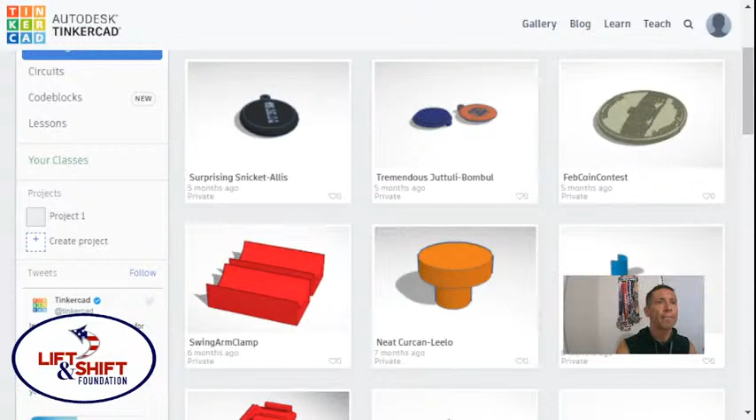Alright, so I've done this in the past. I made this arm right here. Let's zoom in on it a little bit, make it big, make it the center of attention. So this is an extendable arm, two parts, that clips onto the side of my wireframe shelving unit, and that's where my 3D printer is sitting. So right now I want a swing arm right on the same post that this is attached to.

Since I've already got this, I'm going to kind of hack it for the measurements. I'm going to pull these apart, slide those down that way, and now grab this one piece. I'm going to duplicate it, because I want a swing arm like this, two pieces. So I'm going to make one swing arm that I can duplicate, to make it extendable, piece by piece.

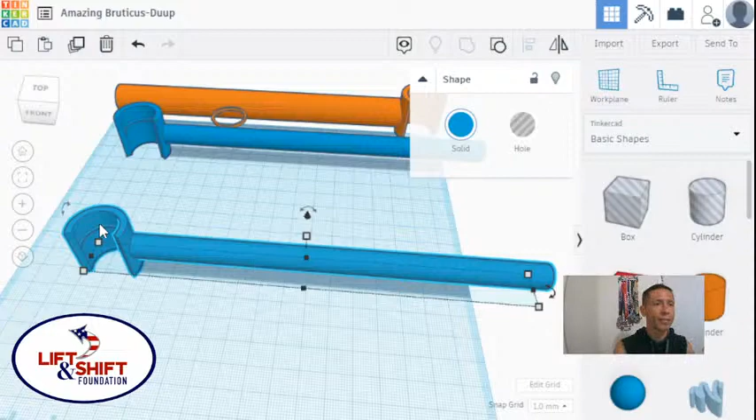And then I'm going to make a bracket that mounts on the post. Believe it or not, this is the perfect bracket, so I'm going to duplicate this again. I love the duplicate feature because it moves things the same distance when you duplicate it. So you see, I had this part, duplicated it and moved it down here, then clicked duplicate again and it moved the same distance away. I always find that amusing.

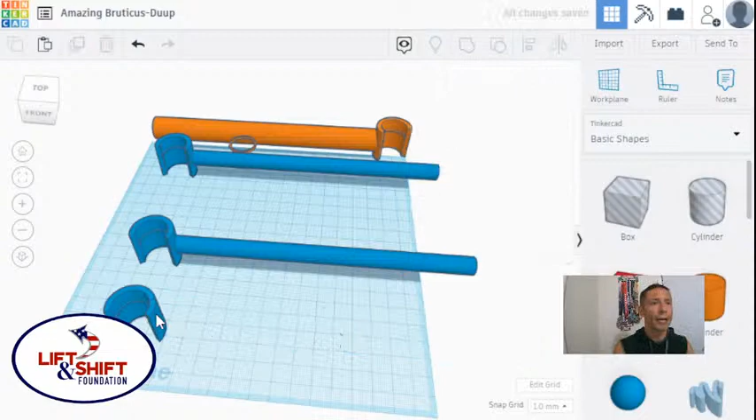But I'm going to take this apart, and you will see what I'm doing. I'm making the rod, or the clamp, so you can see right there how I put this together. I'm going to get rid of this for right now. Let's dive in here, because I need to get rid of that little ring.

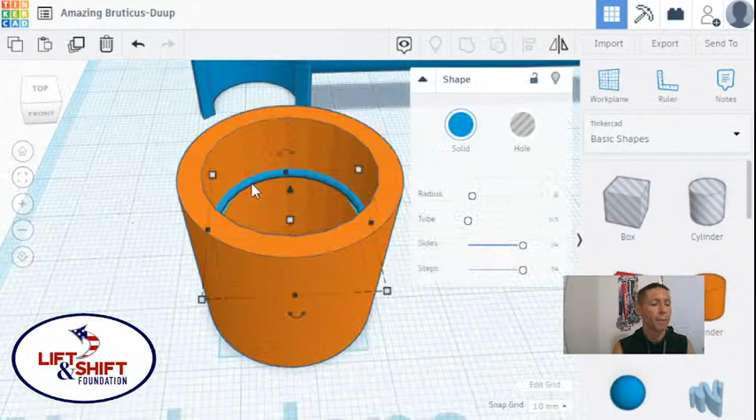So this is going to be my post. And this fits tremendous, it fits perfect on my post as it is right now. But I need another ring.

To make things happen, I'm going to duplicate this. Actually, we're going to do it 3 times. I'm going to set it over there. So this is going to be the part that actually attaches to my post.

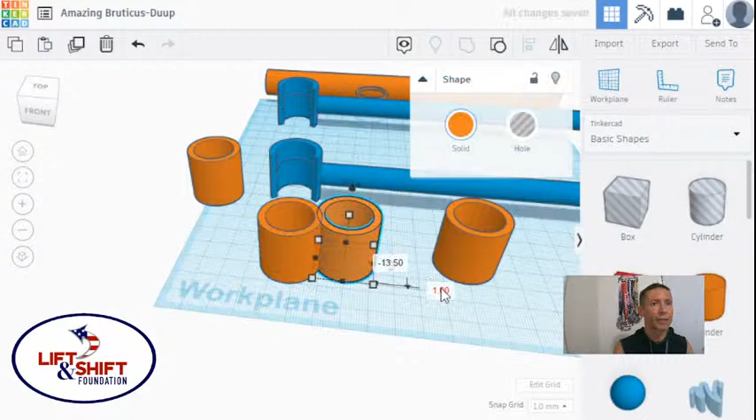Now I want another ring just like this. And this is over here for a reason, for later. And then I want my post to basically go in these and have a continuous swing arm. So that part is cool, I want to do that.

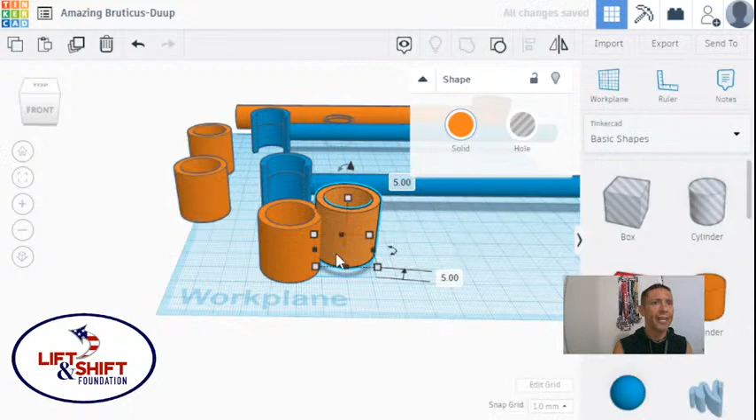But this looks a little creepy. I want to raise this up a little bit like this. But first things first, I can't raise it without... I have this floating surface here. That's not going to print very easy. So here's what I'm going to do.

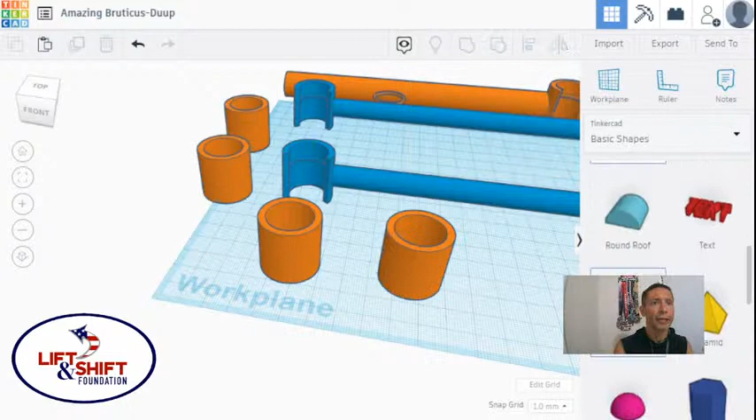Let me back up, I undid for a minute. I'm not going to go deep into the undo and all the features of Tinkercad. Here, I'm looking for the wedge, and I'm going to make it a hole. And I'm going to turn it so I can see it - 90 degrees, like that.

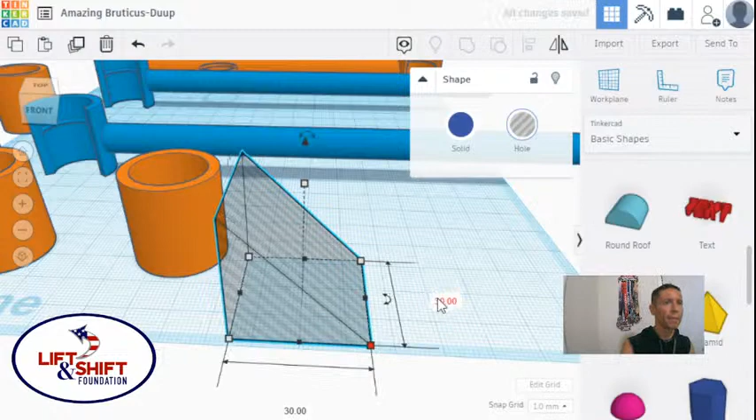Now I need to size it so that it's basically a 45 or less. So let's see, how big is that? About 25 millimeters, so let's make this 30 by 30 by 30. Okay, so now this is a 45-degree angle right here, and I can do this number.

Okay, I like this to have a 45-degree angle because then it's easier to print. But I realize now I need to raise this up some.

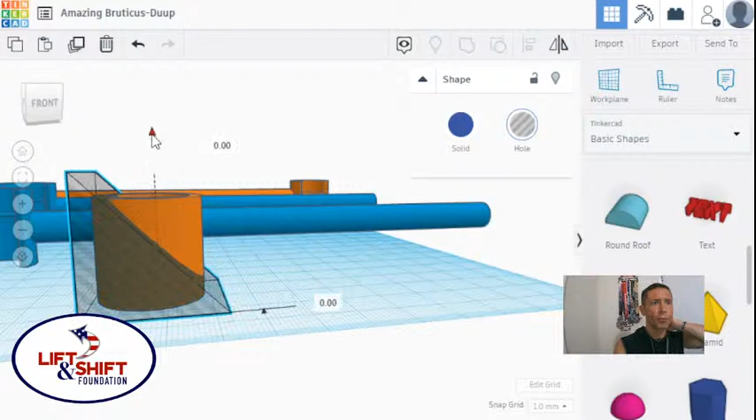Nope, nope, nope, nope, nope. I gotta grab that one. Like that. Now also I need to lift it up a little bit to make this ring, like that.

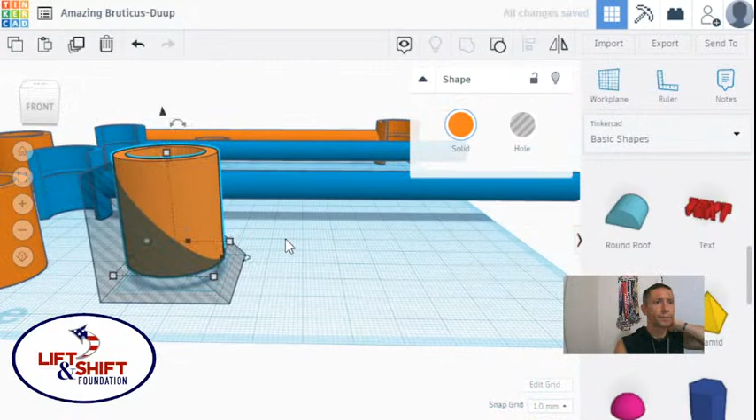And can I get away with lifting it up just a little bit more? Yeah, like that. I just don't want this - since it's going to be in a corner - to have a sharp edge sticking out and jam me in the knee or something, because just like my kids' Legos, this will catch me somewhere.

Cool, so I'm going to slice this up, join them, group them - it's called here. Let's check out the other side of this. Oh, I missed it! Undo.

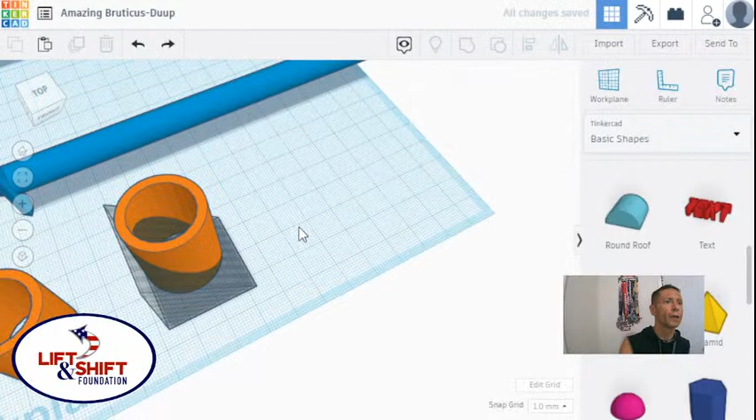So I'm going to slide this over that way. Now redo. Cool. Now I'm going to turn it 90 degrees - or, I'm sorry, 180 degrees.

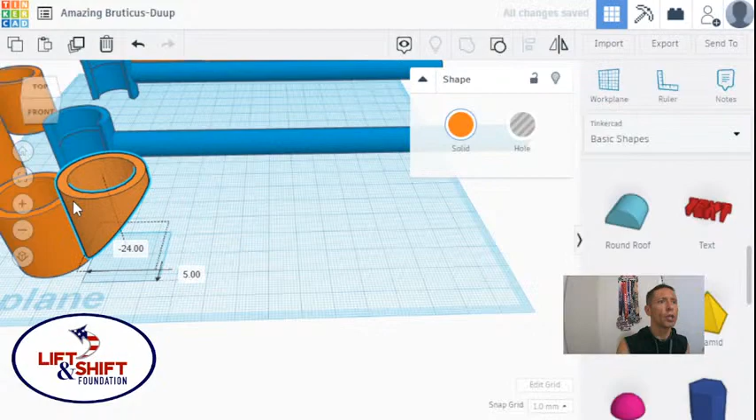Spin it around. Spin me right round, baby, right round, like a record, baby, right round. Never mind, 80s music stuck in my head.

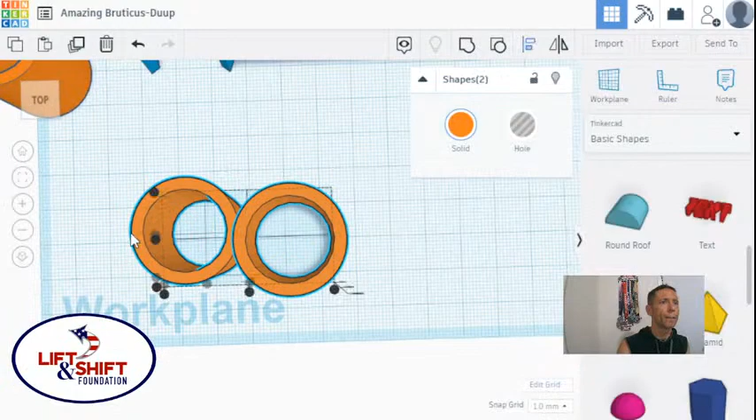Let's do it, so I'm going to lower this a bit. In fact, I'm going to back up, I'm going to align these this way, like that. That way I have this cool angle right there.

Oh, I should have aligned it, I should have made another... actually, I can - double click, duplicate. Pull that out, that's a super awesome feature, I love it.

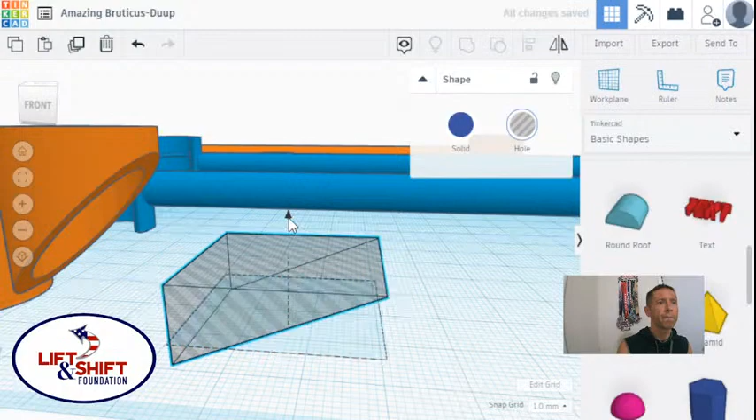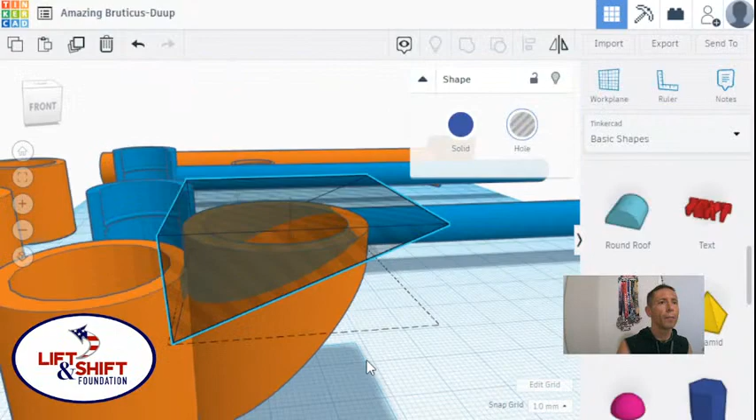I'm going to grab these two and pull them away like that. I want to grab my part here and pull it to the side a little, then get it over all the way. Actually, let's do this - ready? Pow.

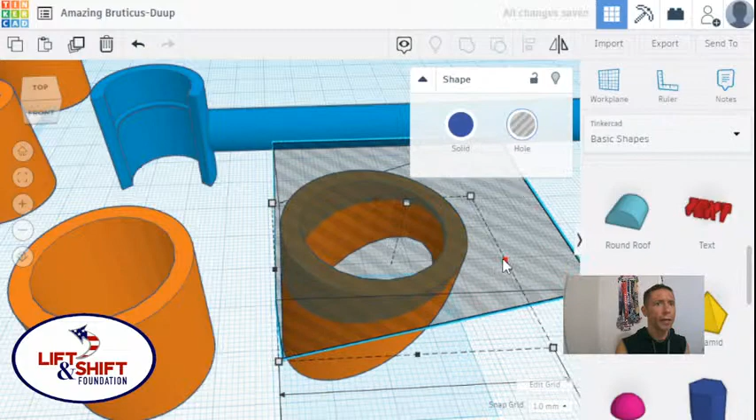Join these two, now I've got this crazy looking ring. I'm psyched about it now, so I can move it back over. Yes! Now I can lift it up, like that.

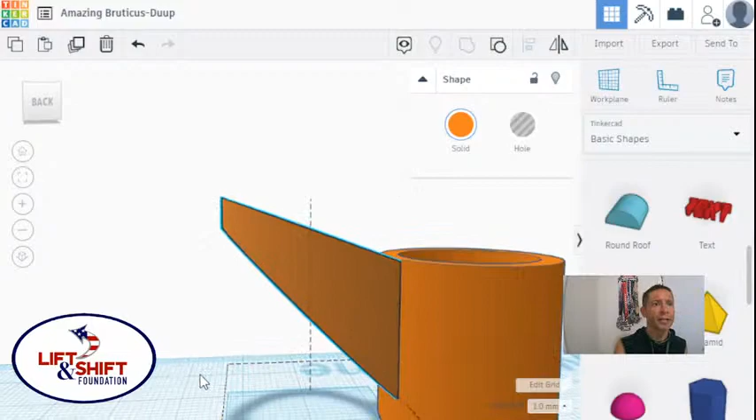I'm just going to briefly mention the reason I like having this part so long on the touching the side is because of physics. So I'm just going to say it - we're going to be creating this rod that sticks out this far.

And if we have a weight, let's say I stick a weight on the end of this, like that - the force down on this is not the force. The weight of this object might be, I don't know, like 10 pounds, right? It's a 10-pound weight. Now if it's a 10-pound weight pushing down here, it's just one straight vector of force.

But because we're putting the weight on the end here, and then we're putting a pin inside here, we're creating other forces, and there are torques involved, and then that's where the distance of this rod adds to the weight here, and the 10 pounds could become exponentially heavier at an angle right here, and then it creates a weak point at the fulcrum.

This is basically a lever, so the weak point at the fulcrum of the lever, or the mount point, or whatever you want to call it. I'm using terrible terms because I haven't done this type of mechanics in a while.

In fact, this is like a whole semester-long class if you've ever wanted to get into mechanical engineering. It goes beyond engineering mechanics, like statics and dynamics, into I believe it's called linkages. There's like a whole class on linkages, like chains and sprockets and gears and things. It's really fascinating to me, but

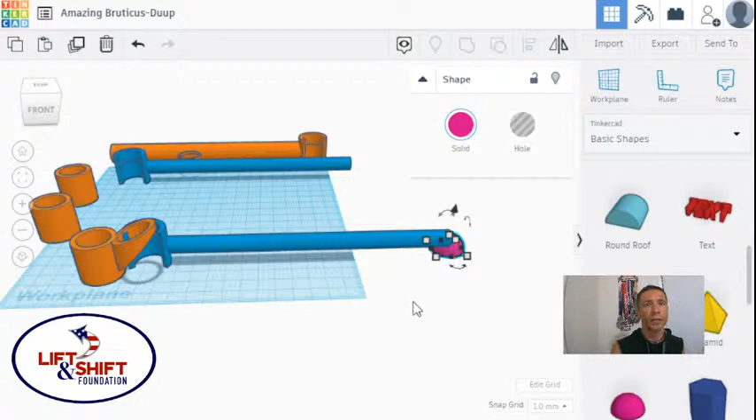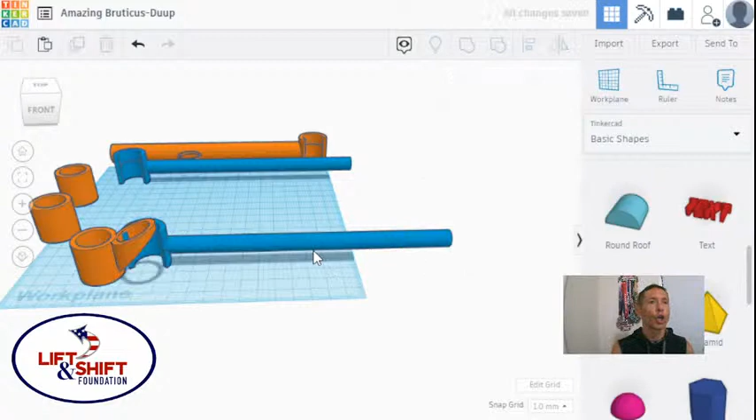yeah, just for reference, I like to have this part come down longer because of physics. Basically, that's the short version. This rod here, without getting into all the math and torques and newtons and vectors and things, is gonna add weight to this part that's on the end. So if I can, I try to make things longer on this part here. Short, very short, non-technical explanation. Hope that was not too boring.

But I've got these parts now lined up, so I've got my bracket ready to go, and I'm going to grab it, join it, poof. So now I've got my bracket that's going to go on my wireframe. And as we move on to the next parts, we want to use this, and we want to make a swing arm. And this part is pretty much already done for us. We already have this arm, and we have half the loop right here.

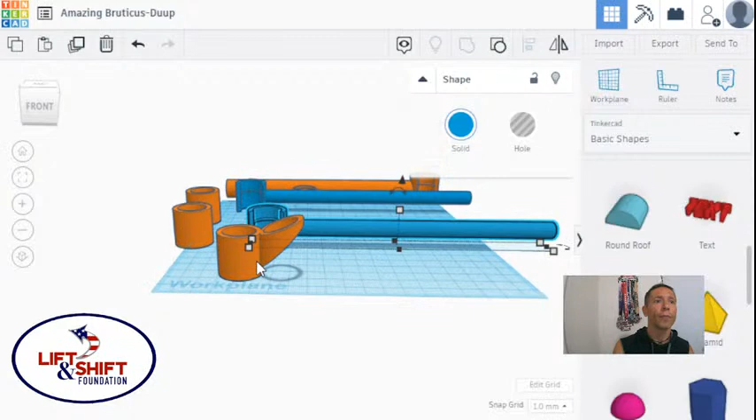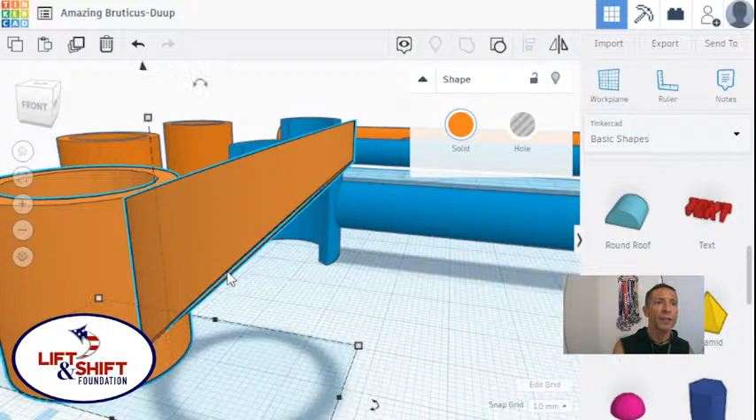And just another note here. I created this part with angles that are so high that I won't have a problem 3D printing it. There's no tight overhang where I have to worry about it. There's this 45-degree angle going up. So my printer should have no problem printing this angle right here as a floating type overhang, which is another reason why I did this. I don't want to print it with a support structure.

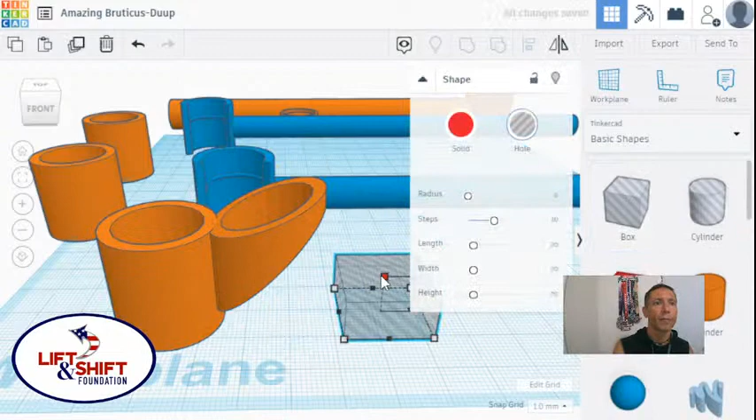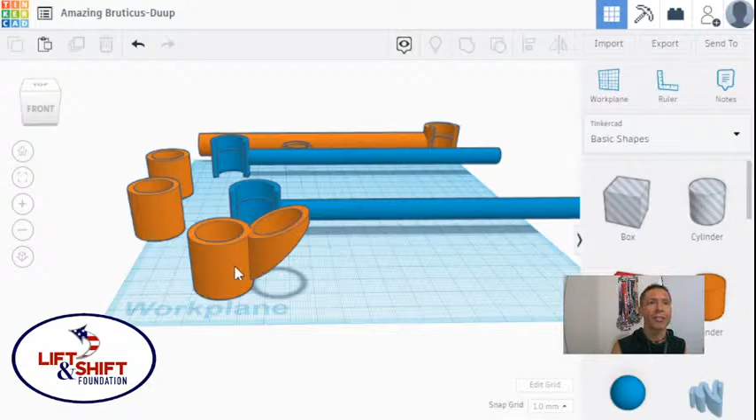And if this does not work, then I have to go back to a flat surface on the top. I would go back to something like a flat surface like that, where I could flip it over and print it upside down on my printer with all the stuff there. But I kind of dig this thing, and I'm gonna test it out. This is a small piece, so I can go through iterations and iterations of it. What I really want to focus on now is the swing arm. So we're going to set this piece aside over here, because that I think is good and ready to print.

Now the cool part about the swing arm is, if this is an extendable swing arm and I make this properly, I can print multiple ones instead of one long. This is a 9-inch arm, and maybe I want 9-inch, maybe I want 12-inch. I don't know. I want to be able to add and remove length to it. So I want to make it like a scissors almost. So what I want to do actually is take this apart, and it's just going to keep getting in my way, right? And I want to shrink this down like that.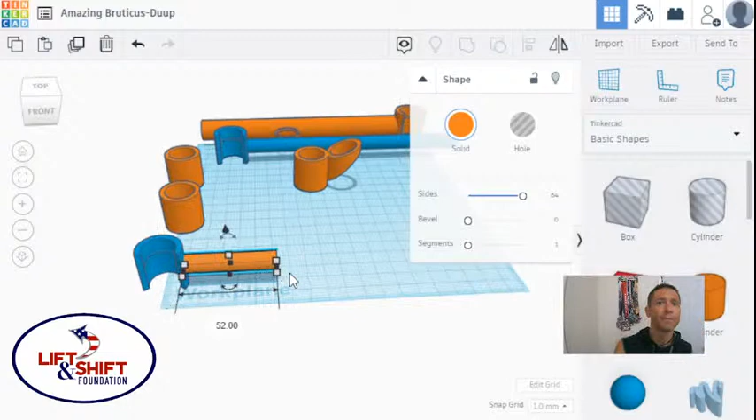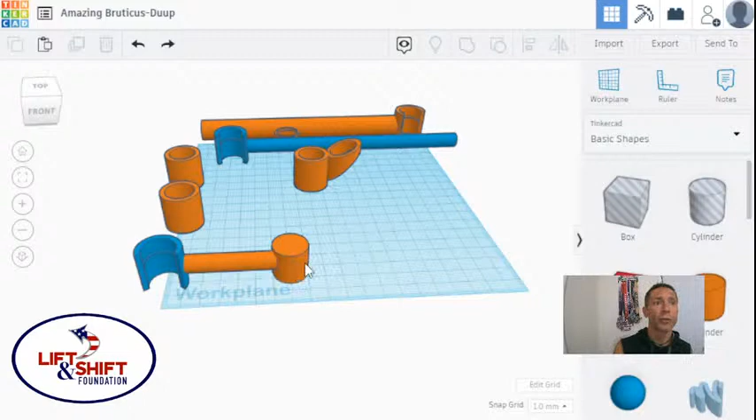And then I want a loop on one end and a pin on the other end. I want basically something that kind of looks like that, so that this pin can go in my, whoops, undo. So my pin can go inside this part over here, and that's really what I want. So right now we're very, very close actually. And if I do this with this 3-part, then this whole assembly right here I can print over and over and over again, and just keep adding more links as I need them. And this will look a lot like, I don't know, like a scissor jack or something.

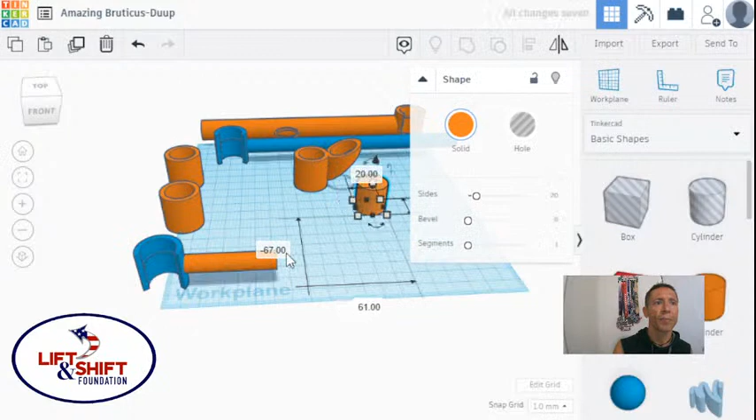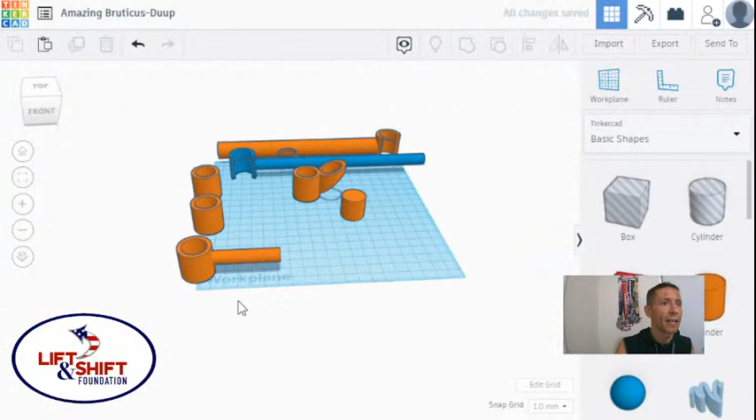But I'm gonna set this pin aside for now, because what I need to do is alter this arm here. And if you remember, at the very beginning of this, I made this bracket the same size as this arm, which was a copy of one of these. So if I make this arm with the same dimensions here and don't change this, whoops. So for example, I leave that as my swing arm frame, then I'm very well off, because then all I need is to make sure this pin fits inside, just like it fits inside here, and then I'm good.

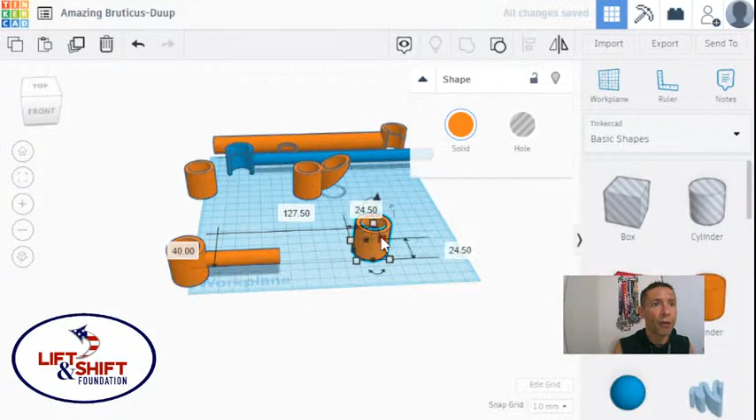But I'm going to delete this, and I'm going to bring this back over here, because I happen to know that when I made this, I made it out of this solid cylinder and a voided cylinder. So I'm going to duplicate this voided cylinder.

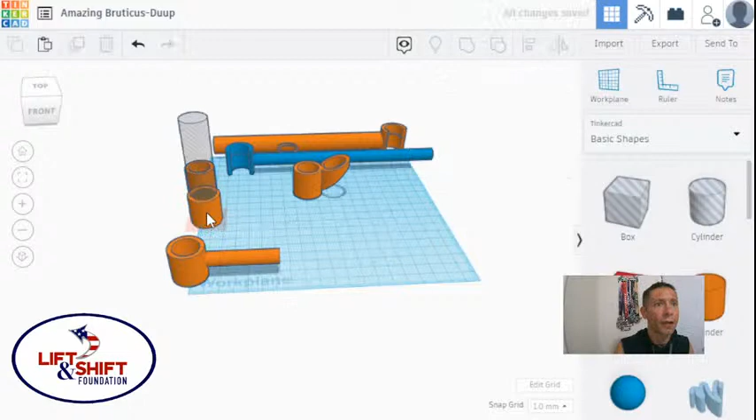Oh, first I'm going to back up. I'm not going to use that feature. I'm going to use the double-click feature, and I'm going to grab that voided cylinder and I'm going to duplicate it, and I'm going to put it over here. Now I'm going to click away. So I just got this back. I can make it a solid, and now I know exactly how wide this cylinder is.

Excuse me. So in the context of Tinkercad modeling, I've kind of got this down. I'm just going to crank up the sides. And what is this? 19.50. So here we go. Here's some interesting stuff. I need this to be just slightly smaller than the ring. I need this part to fit inside of this part. So I need to just make sure that it's slightly smaller.

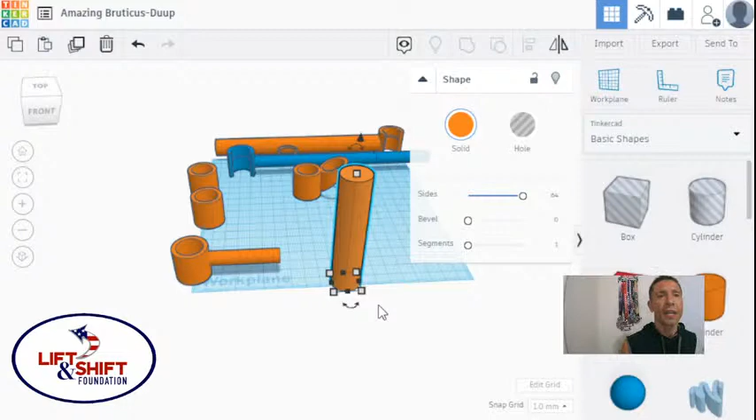So I need to, I don't know, make this maybe 19 millimeters in diameter. But my 3D printer has like a minimum tolerance. So there's a minimum size that it can print, depending on which setting I use to print, and I'm probably going to use like 0.2 millimeters, like a standard print profile. If I go in 0.2 millimeter increments, that's going to work.

So right now it's not going to print 19.5. It might not print 19.5. It might print 19.4 on my printer. Between 0.4 and 0.5 is what I've kind of determined. Anyway, what I think I want to do here then is change this to, let's say, 19.25. That way I give myself a little bit of clearance. So we're going to do this, 19.25, tab, 19.25, done.

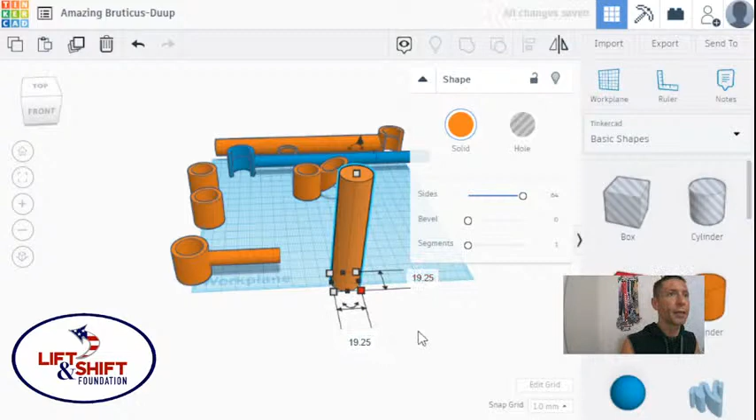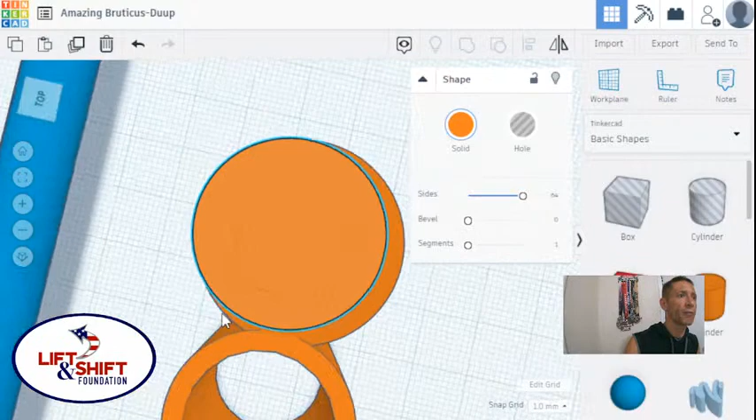Now we're going to bring this down somewhat like that. So this is the size of the pin that I want. And this pin will fit inside here. In fact, if we do this number, we can see that it's very close to fitting right in there, right? Yeah. And if we drag it over here and actually do the align thing, we will find that there is a slight bit of room inside of it. In fact, I might drop it down to 19.1.

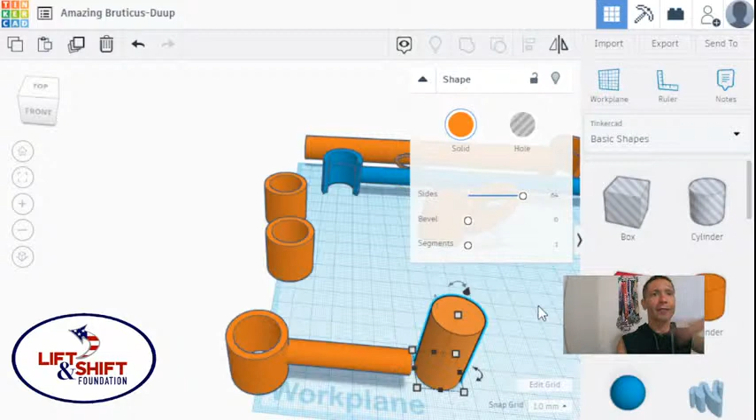Because millimeters are tiny to begin with, and we're looking at a grid that is very, very tall. And I don't want a lot of play in this, so my arm doesn't flop all over the place. I want it to be very, very tight in there. So actually I'm going to leave it where it is for now, and I'm gonna make some adjustments here to make this one complete model.

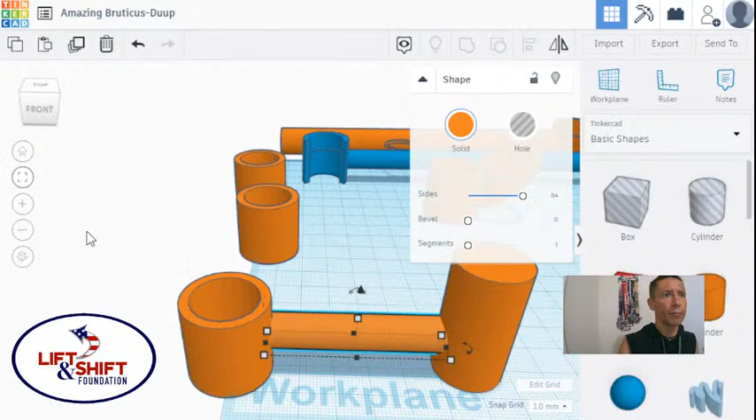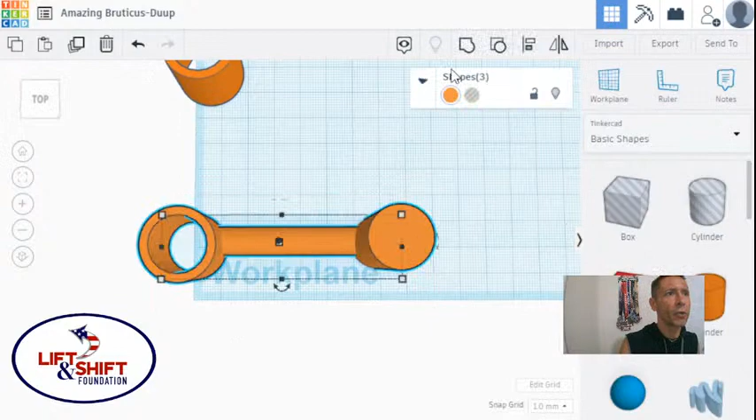One of the first things I'm going to do now is move the view to the center here of this. I'm going to put this out of the way. One thing I need to do is move this down so that it's on the bottom, because I can't print in space, and that's cool. I want my swing arm to be a little odd shaped. The other thing I'm going to do is align these here like that. Cool. Now, me personally, this is a 10 millimeter rod.

And if you give me just 1 second, I will go get the real part. It's right here. It's right on my printer. And so, here we go. I'm back right now. This is the original bracket. And this is the original outside the tube.

And this went together, and it extends, and you can see, ta-da! I can set this on my thing, and it actually hangs on my printer, and it holds up my 3D printer filament. But this is a 10 millimeter rod, and for a swing arm, that's reasonable, right? And then these are the arms, and they kind of fit like the bigger rod here. You can kind of see that. So it's not unreasonably sized.

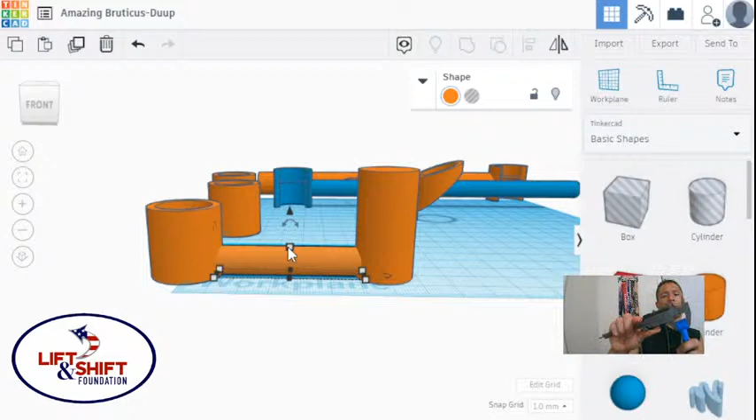The one thing I will say is I'm going to break out the caliper and say that this part here is 1 inch tall. So that's going to give you some perspective. So this looks more like 7/16 of an inch. And I'm okay with that. I'm really okay with that for like a 3-inch arm, I think.

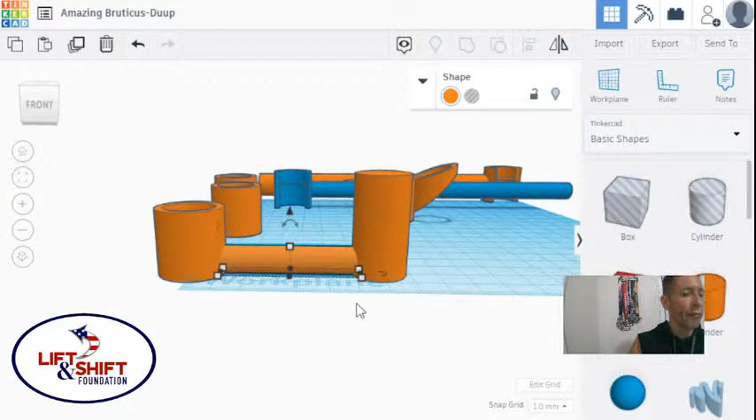Which means instead of me making this part taller, 24.50, I'm going to bring this part down to 24.50, so they're both the same height.

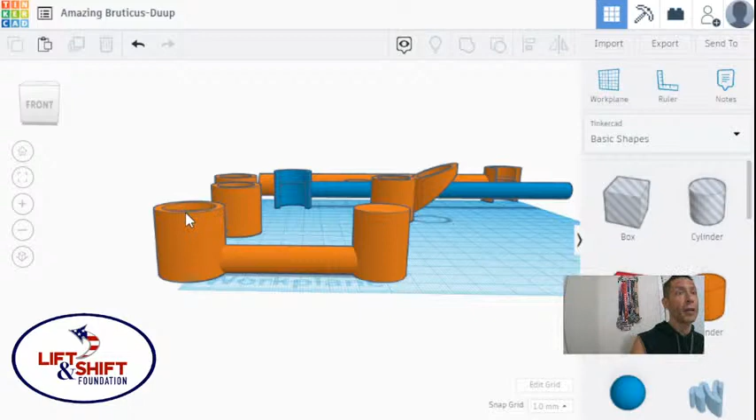Cool. So this is not actually going to go all the way into this pin because the arm is here. The arm is in the way. Yep. Surprise! So even if I make these the same height, they're not going to interlock at the same height. So this part will never ever be shown out the bottom. It won't be flush even though they're the same height.

And subsequently every other arm is going to be another half inch, basically another half inch up higher. So I will want to mount this thing, and let's see how long this thing is. 90 point. This is the part I want to work on next, is how long this is. I'm not going to do any math right now because I'm lazy, and I know this is much easier to do. So this is about 3.5 inches wide, and I was going to say about 3 inches, but I don't want to be cocky.

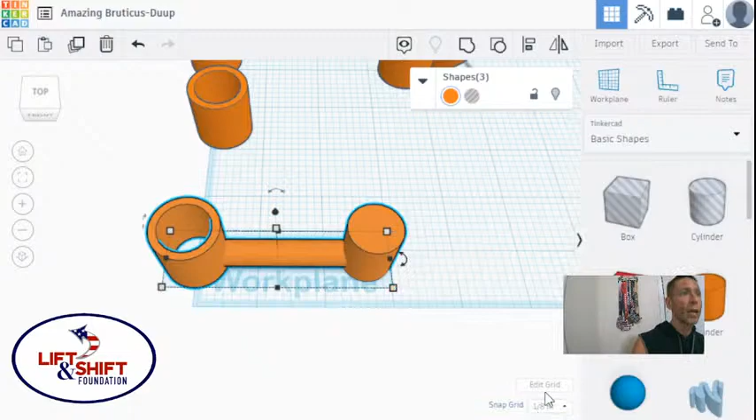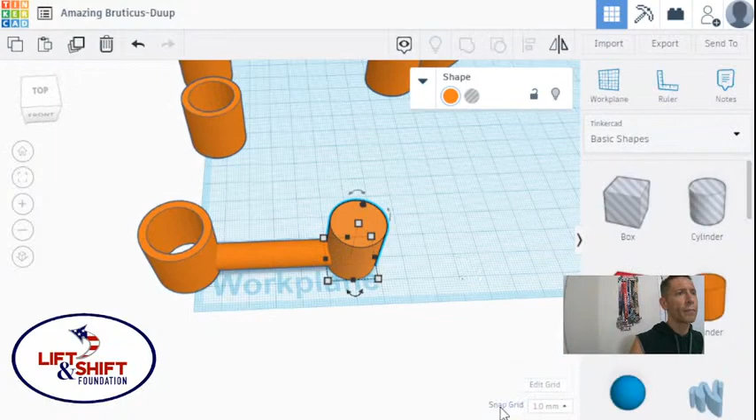So let's see, 3.448. I'm okay with that. I'm going to move back to millimeters. I said I wanted about a 3-inch. In fact, I'm going to shrink this in a bit. Keep going. Nope. As I said, I wanted it about 3 inches. Although now it's starting to look a little goofy, right? Maybe I do 4 inches. Yeah, 330, and it's starting to look a little goofy. I haven't even got to 3 inches yet. So let's move it all the way out to like 4 inches.

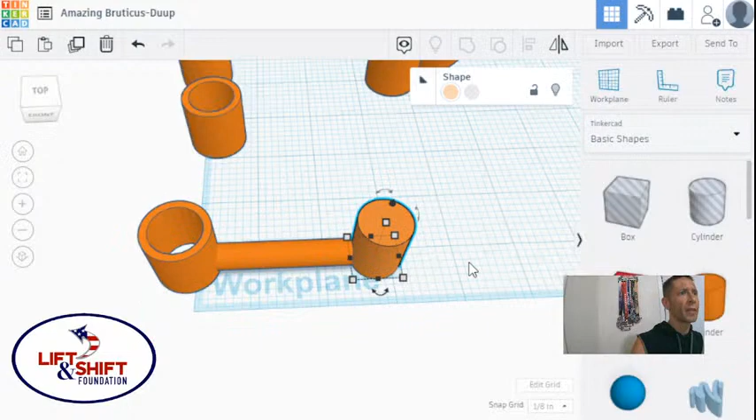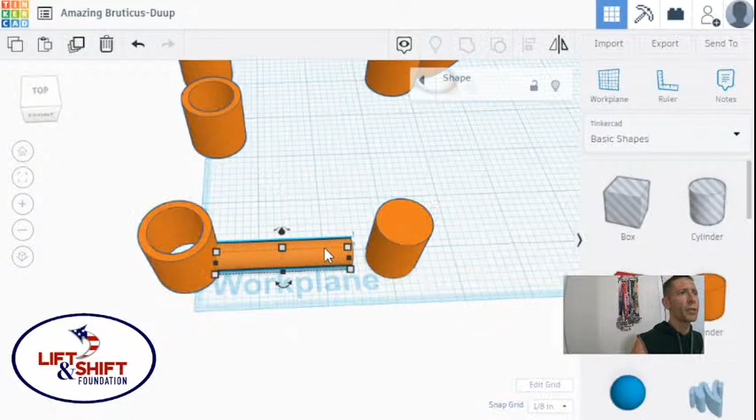375. 383. One more. 3955. Close enough, right? That's very close. So here's what I'm going to do. I'm going to slide this part out like that. I'm going to go back to millimeters. I'm going to move this part a millimeter out. Actually, I'm going to snap grid to 1/4 millimeter, and I'm going to move it 2/4 millimeters out. And then we're going to see just where we are in inches. 3.974. That's so close, right?

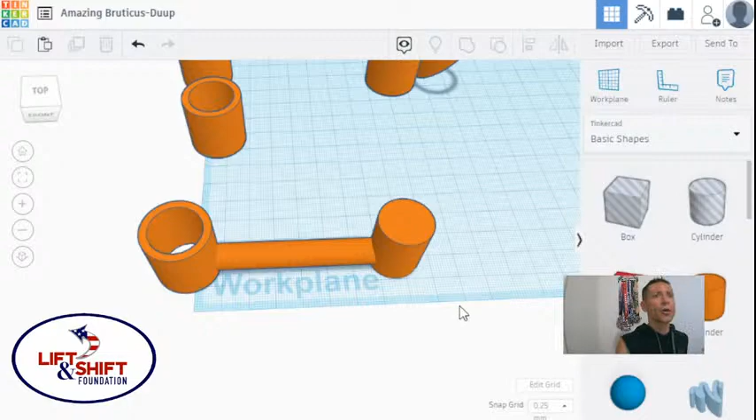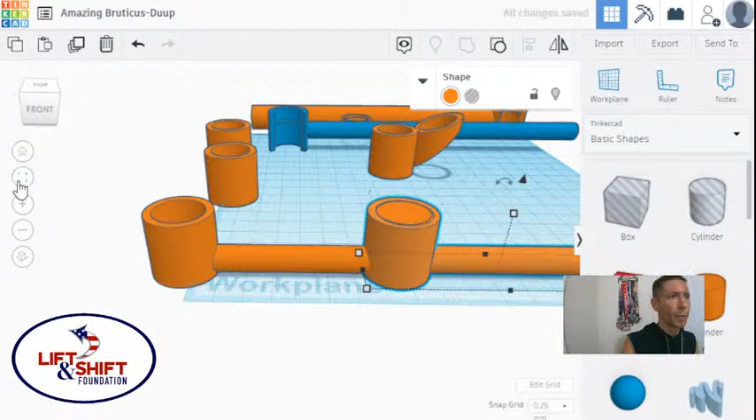Dun dun dun. So I'm not gonna get all wrapped up around the axle on this one. I'm just gonna leave it right there. That's gonna be my 4-inch swing arm, and it's only one. So let's do this. Let's group. Pow. Cool. There's my swing arm. So check it out now. We're going to duplicate this, and we're going to put it like that. Now you can see my swing arm actually happening, except it won't ever fit like that. It will go like this, if you see what I'm saying.

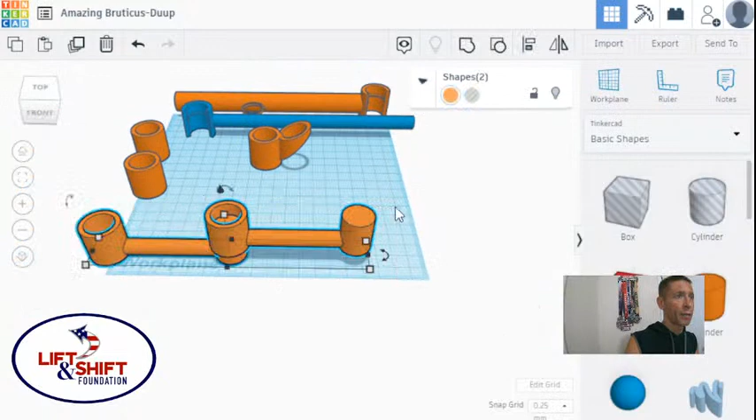So the swing arm assembly will swing like that. And in fact, this whole thing will turn like that. And then we can turn each piece, or we can turn it all together. But here's what I want to show you. It's actually going to fit right there, like that. And now, as I'm piecing this together, I'm realizing there is a flaw, because this raised part will not want to sit out here. It will always want to come back and rest on the pole. It will always do that.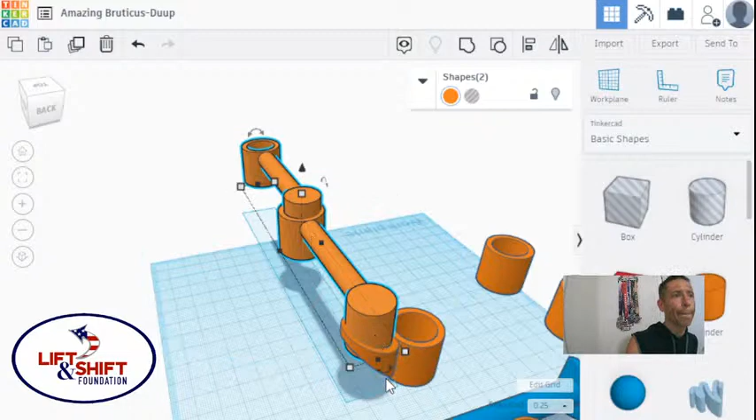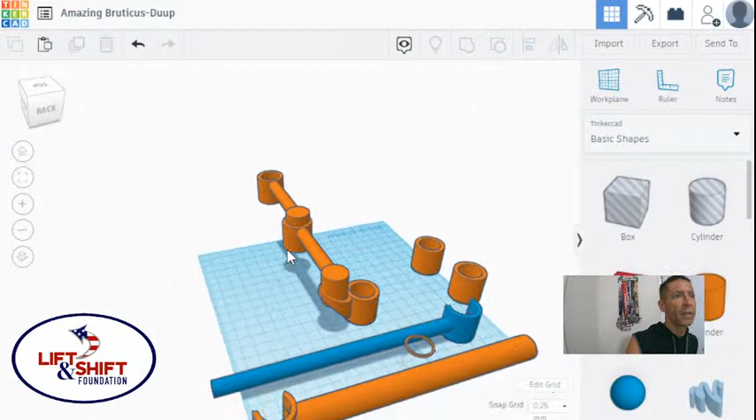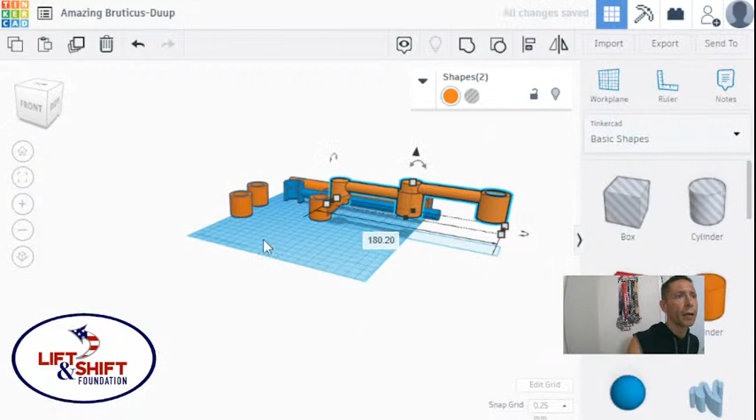So I may need to redesign this bracket to have a flat top to begin with, so that this spins freely without having friction drive it back, or gravity drive it back. And if you see what I'm saying here, basically, if I attach this way, like that, this part is not going to stay straight out. It's going to want to slide down, which means it's going to spin.

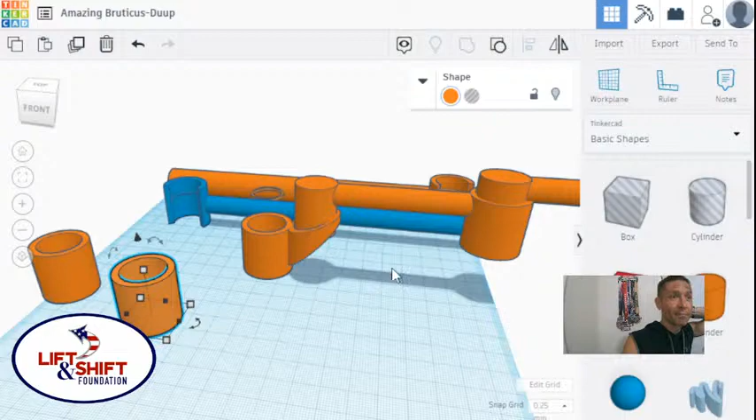So I may need to change my bracket idea, which is why I had a couple of extra ones over here, because I may have to just put two brackets next to each other, like that. And the other thing I thought about was actually making the clip so that this clips on. I also thought about using the first bracket as the rod, which is possible. Just have this part slip over my post and flip it all upside down. But then I want this circle part out here because I want to be able to put a camera mount on this empty post, which is still possible over here, but unlikely.

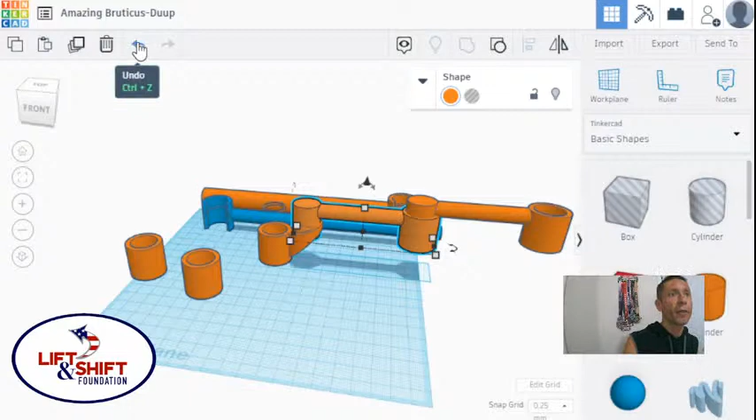Anyway, those are my parts. This is the first iteration of a swing arm. This stuff is so easy to do, and hopefully you caught on to some of the smaller things that I did, like let me go back here.

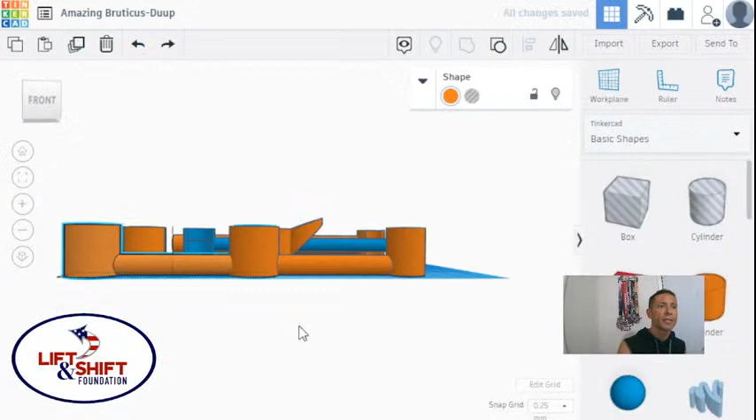Backing up, yep, right there. See, all these are flat, so that I have a good print surface to actually print them. And over here, where I had this overhang, I may try to print this a couple different times with a couple different angles to see if I can get a flat top. Actually, I can do that. Here's... I'm just going to delete that because I don't need that part. I can just print like 5 of these if I really want it.

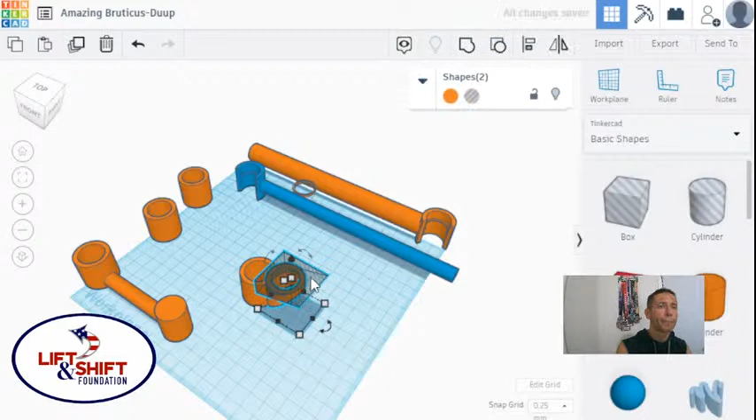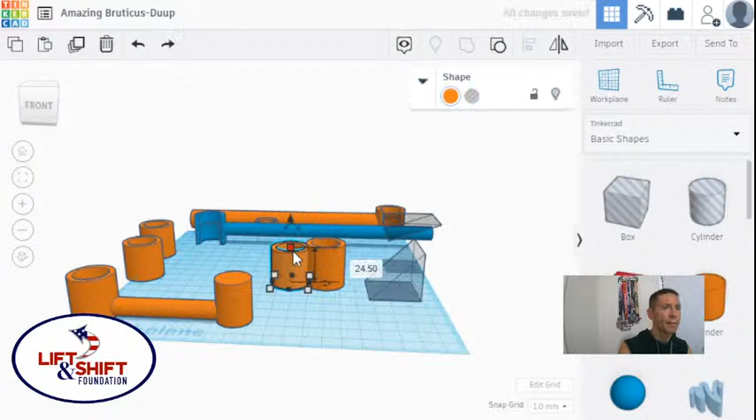But what I can do is take this apart, take this apart, whoop, take this apart, lower this to 0, snap my grid back to 1, make, oh, whoops, make these the same height, 24.50, 24.50, like that. Actually I can leave it raised up like that. No, I can't, not the way I'm doing it.

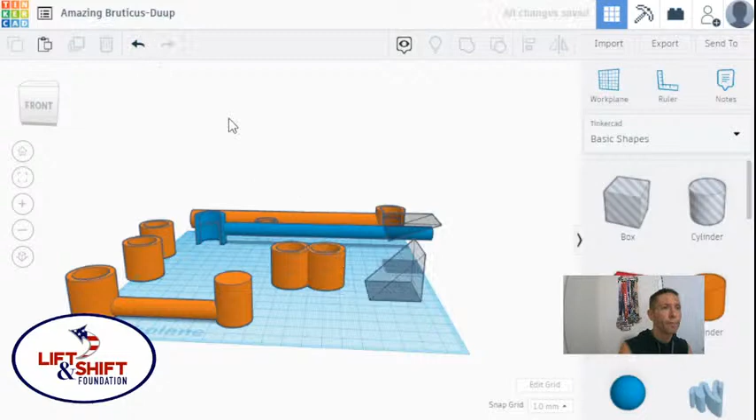24.50. So now, if I flip this upside down, I don't have to worry about my overhang being too steep or not steep enough. So let's do 15. Set this here. Now I'm just going to walk this over so it doesn't move. Whoops. So I got the whole thing there. Cool. Got those two pieces, put them together. Now I'm going to walk this back over.

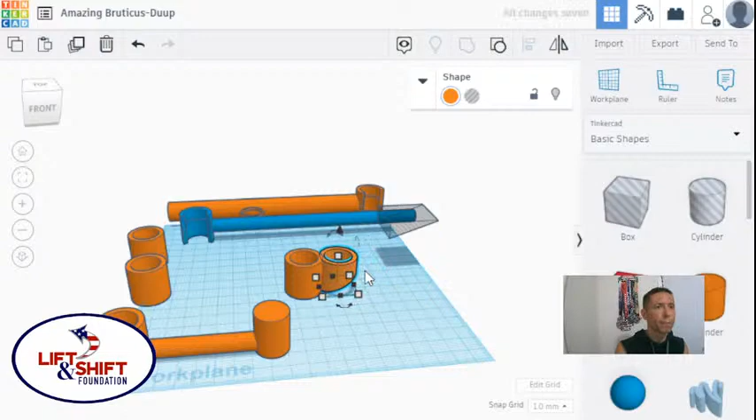It just got really loud, huh?

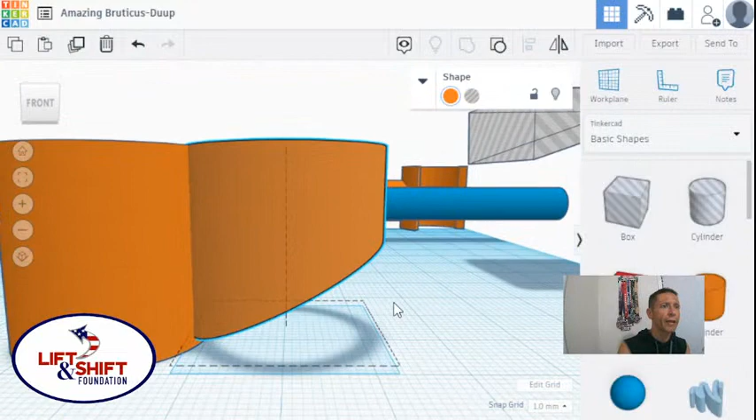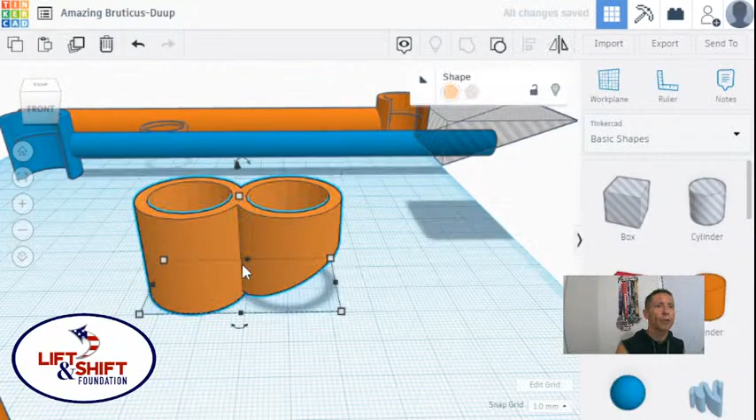Okay, those are overlapping, but not really. I'm going to go with my 0.5 millimeter there. Snap back. So now I can print this upside down, and I don't have to worry about this overhang right here. Cool. And I'll have a flat surface on the top for my rod to spin around in. So I can join these together. And instead of trying to print it like this with this overhang, I'm going to flip it over. Like that. I can print that with no problem.

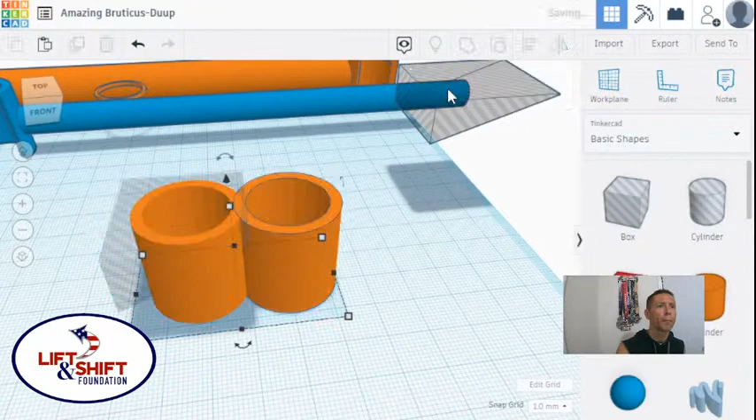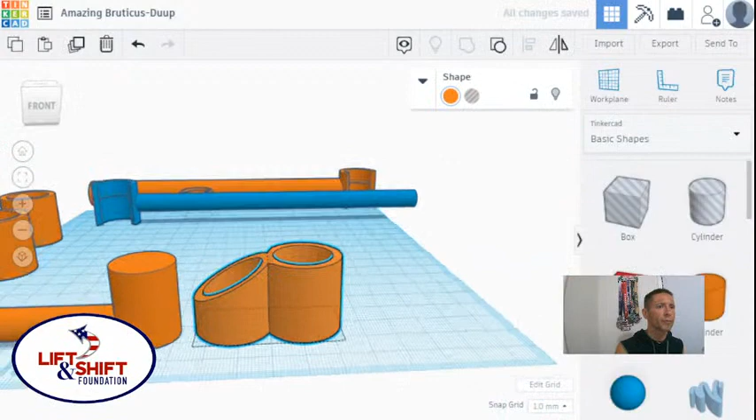In fact, I could have made this whole thing go that way. Let's take it apart. Take this one apart. And do just that. Let's see what happens. Yep. It's got a sharp bevel to it, but okay. In any case, I think I'm done. Either way, I'm going to get that creepy bevel. Well, I'm going to delete this part. And there we go. So now I've got these two parts here that I'm going to print and make a swing arm.

And the super cool part is I have a selfie stick that will go inside this post right here, so I can mount my backup camera and use that to take videos, pictures, and everything else. And I've got a super plan for taking still pictures of every layer. Excuse me. So that will be at a later point in time.